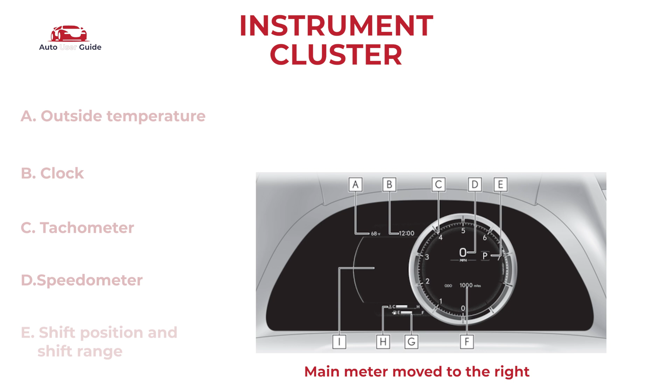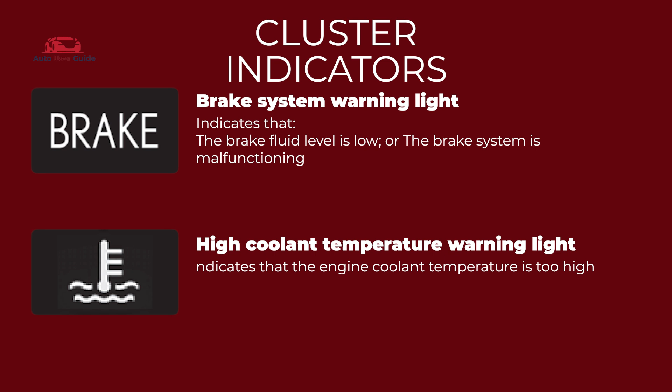Cluster indicators: Brake system warning light, high coolant temperature warning light, charging system warning light, low engine oil pressure warning light, malfunction indicator lamp, SRS warning light.

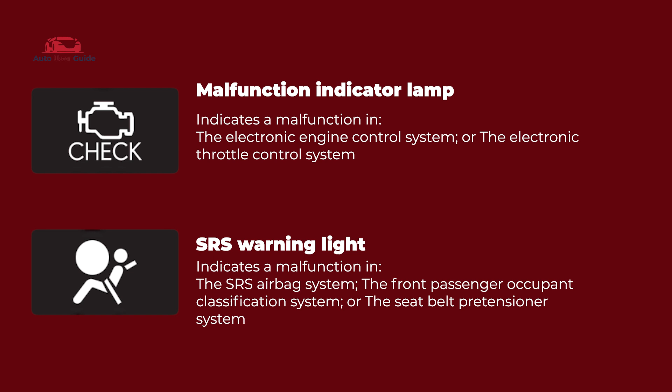ABS warning light, inappropriate pedal operation warning light, electric power steering system warning light, low fuel level warning light.

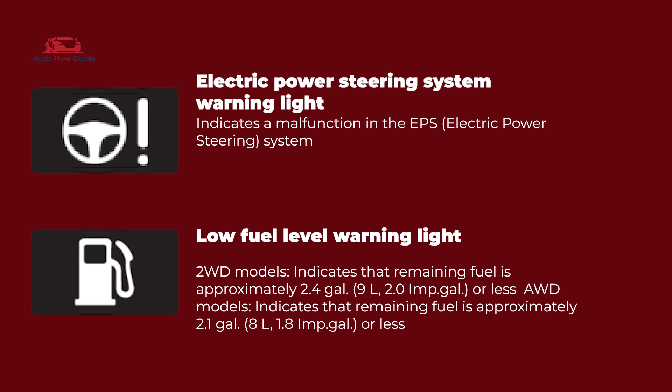Driver's and front passenger seatbelt reminder light, rear passenger seatbelt reminder lights, tire pressure warning light, LTA indicator.

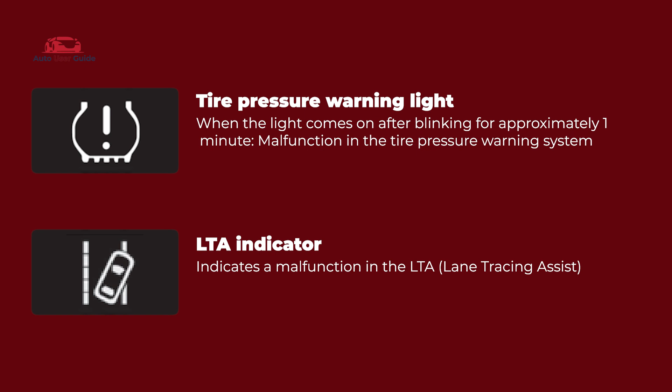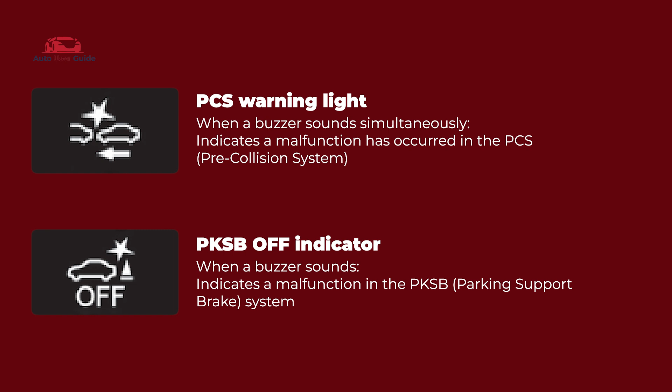RCTA off indicator, RCD off indicator, PCS warning light, PKSB off indicator, PCS off warning light, slip indicator.

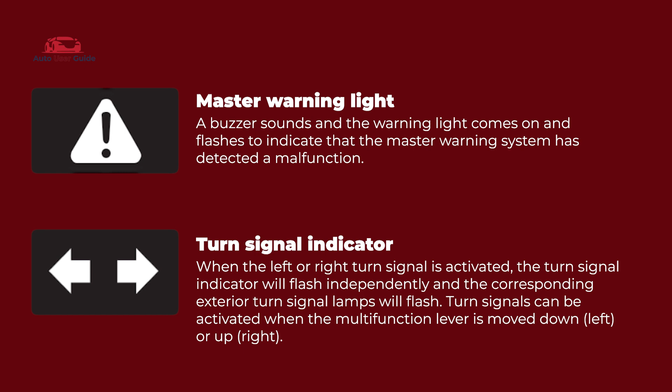Parking brake indicator, brake hold operated indicator, master warning light, turn signal indicator, headlight indicator, tail light indicator.

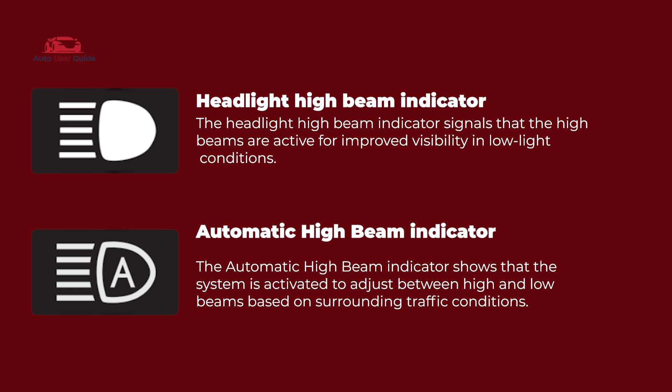Headlight high beam indicator, automatic high beam indicator, PCS warning light, cruise control indicator, dynamic radar cruise control indicator, cruise control set indicator.

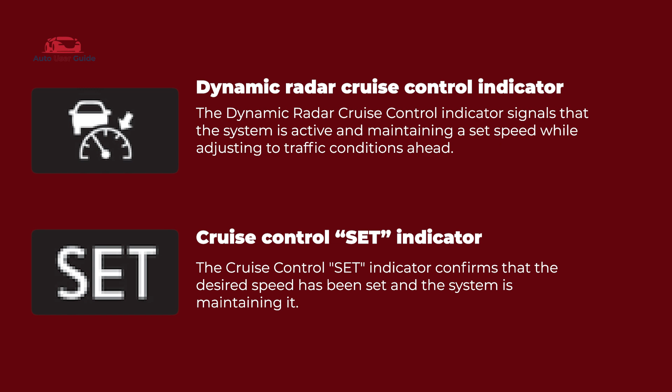LTA indicator, BSM outside rear view mirror indicators, BSM indicator, intuitive parking assist off indicator, VSC off indicator, smart access system with push-button start.

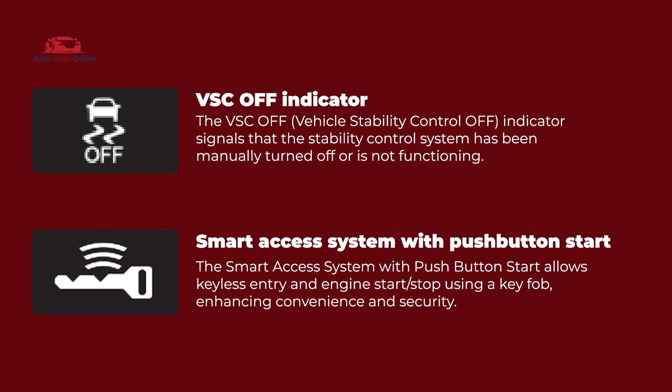Brake hold operated indicator, Eco driving indicator light, low outside temperature indicator, passenger airbag indicator lights.

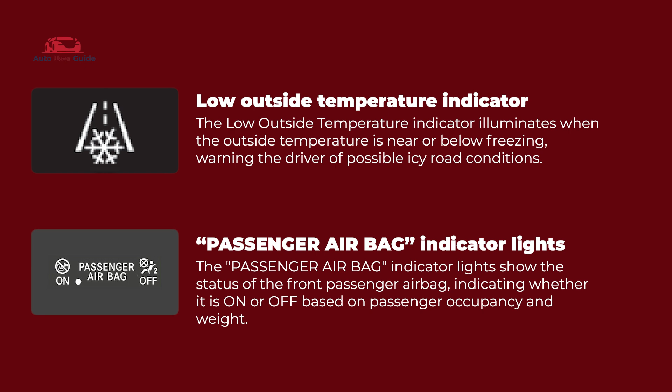Sport mode indicator, custom mode indicator, Eco drive mode indicator, Sport mode indicator, Sport S mode indicator, Sport S plus mode indicator.

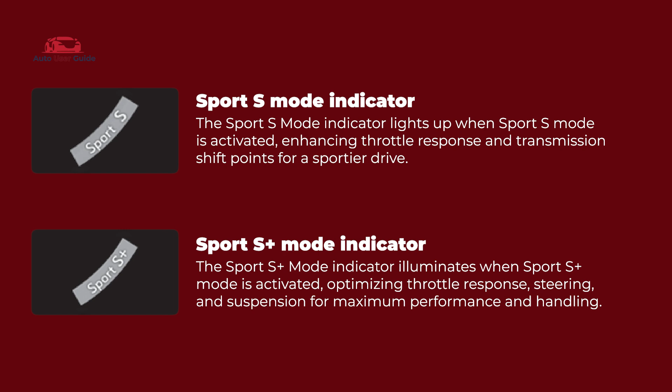Safety precautions. Know your symbols. Immediate attention.

Don't ignore a flashing symbol. Stop driving for red warning lights.

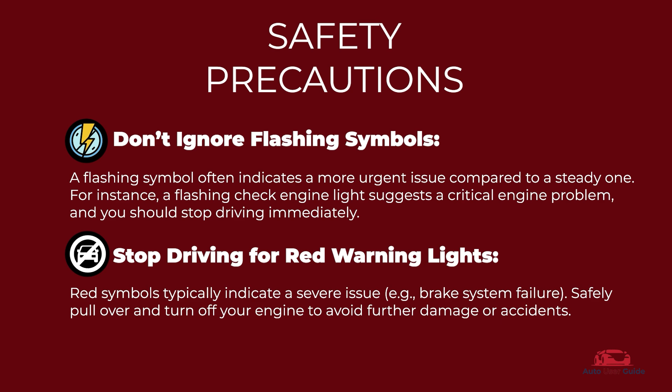Check manual for unknown symbols. Regular maintenance.

Cluster awareness. Don't distract yourself. Low visibility of symbols. Use OBD2 scanner for diagnostics.

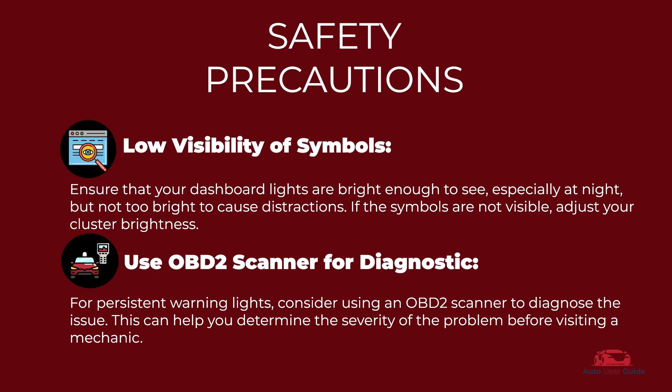General instrument cluster symbols. General dashboard warning symbols are designed to help you understand the most common indicators found in all vehicles. Whether you're driving a sedan, SUV, or truck, these symbols play a crucial role in keeping you informed about your vehicle's condition and safety.

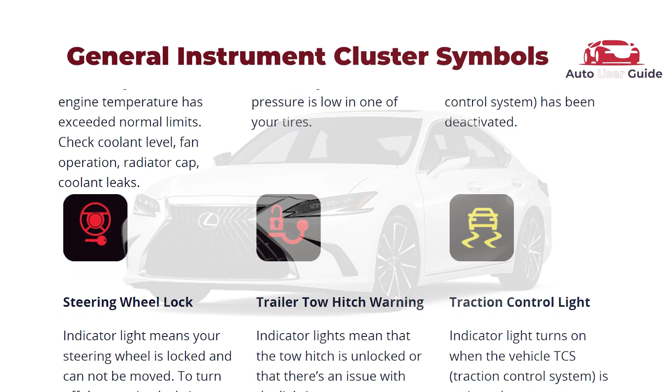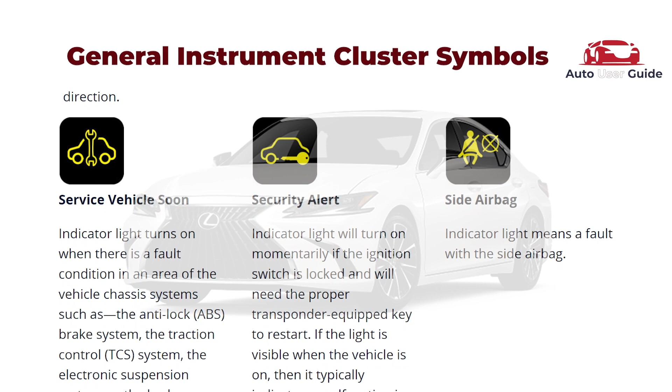Knowing what these symbols mean and how to respond can help prevent breakdowns, maintain your car's performance, and ensure your safety on the road. From the check engine light to the oil pressure and battery indicators, each symbol serves as an alert to help you take action before a small issue becomes a bigger problem.

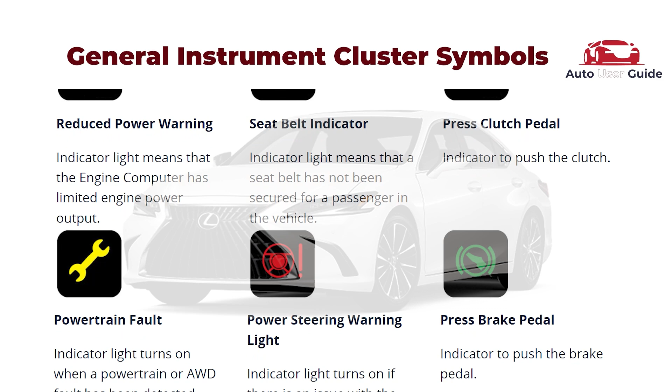Understanding these warnings can give you peace of mind, keeping you aware of potential issues and allowing you to address them promptly. Now let's dive into the most common symbols you may encounter and what they mean for your vehicle.

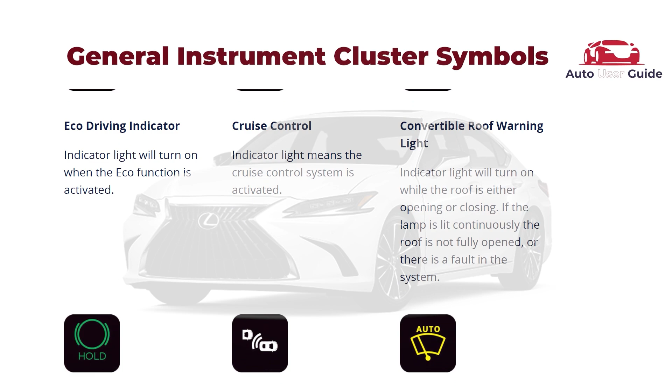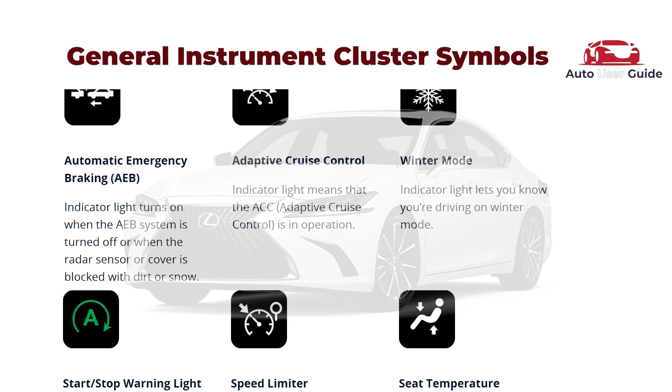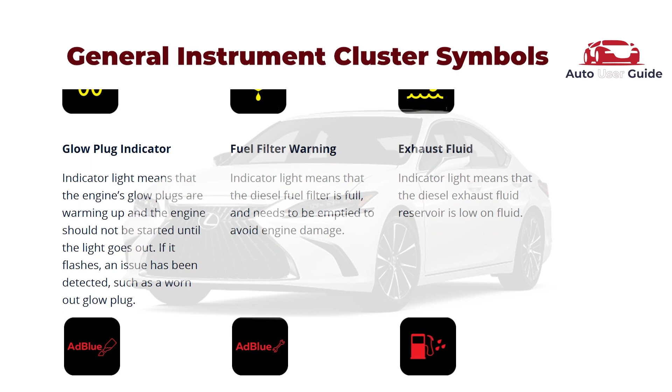Now that we've covered some of the essential symbols, keep in mind that while many dashboard indicators are universal, some may differ depending on the make and model of your vehicle. It's always a good idea to consult your car's manual for specific meanings and recommendations.